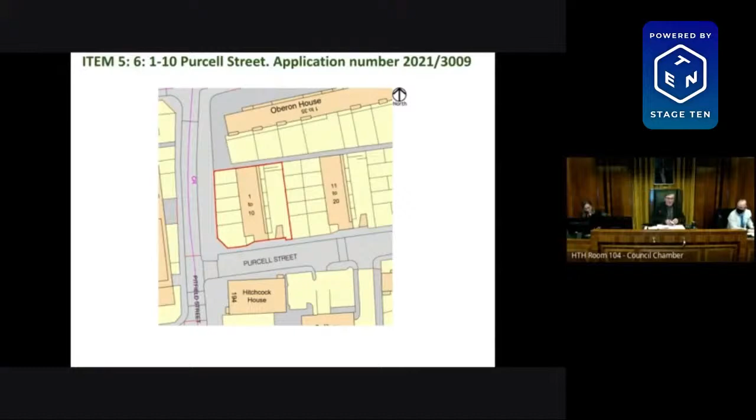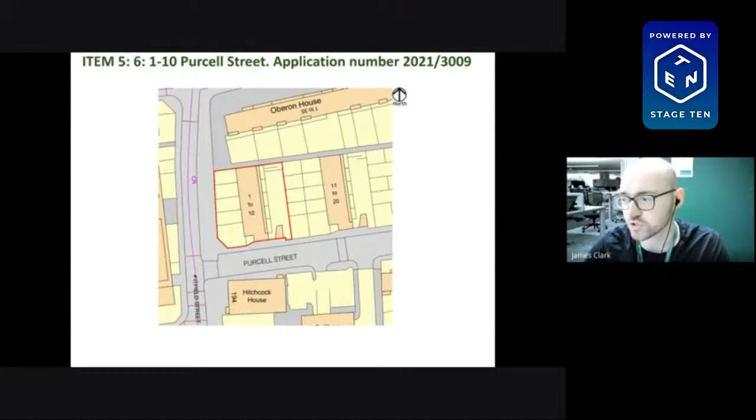This is 1 to 10 Purcell Street, at the junction with Pitfield Street, just to the south. We've already dealt with a similar application on this site, which was for the replacement of windows. This is a similar proposal, but instead of just replacing the windows, it will also be replacing the paneling below the windows, the doors that lead onto the balconies, and the communal windows in the staircase. So essentially, it's a very similar application to what we've had before.

It's also similar to one recently dealt with by committee - I think at the last agenda it was one of Danny Huber's applications. In fact, it's identical to that one. You can see in the surrounding context there are three blocks just behind this one where planning permission for an essentially identical proposal has already been granted.

This is a very strong established precedent for this sort of work in the area already. As you can see in the surrounding area, it's a mixed typology of buildings with varying different styles, most of them modern, with varying types of windows that already exist.

The reason this case is being taken to committee is because it's the council's own application, and we've received 2 objections from 2 residents in the block objecting to the works. Among the objections submitted, the most material are objections to replacing the timber windows with plastic, concerns that the existing windows are already of sufficient quality and don't need replacing, as well as concerns raised over the consultation.

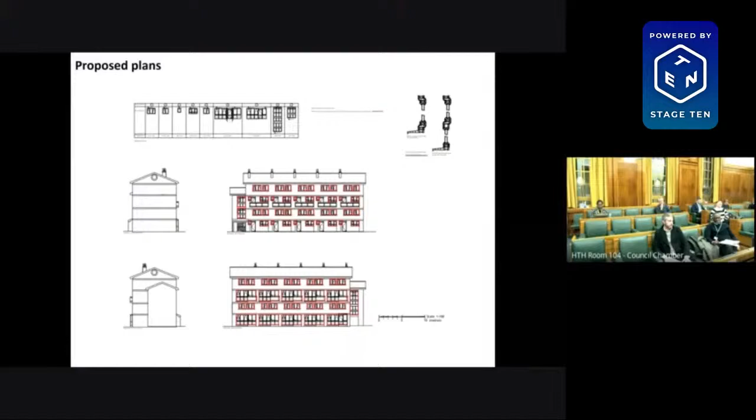I know we've seen this before, and I perhaps should have asked this previously, but having just been doing some work with sustainability strategies, I wondered how UPVC fits in with the council's sustainability strategy. It's just been pointed out to me that a planning application to change timber windows to UPVC windows was turned down. I suspect that's in a conservation area - it's in Eleanor Road in E8. I wondered whether we're taking a different approach to our own council buildings than to individual Victorian houses, and why.

Okay, so we're talking about this application, not applications in the generality. But James, if you can tell us something about that, then please.

I can't hear you, James. Unmute. Sorry about that. Sorry, Councillor.

In terms of sustainability, we weren't concerned about the existing timber windows - they're acceptable in terms of appearance. But in terms of UPVC windows, we have approved similar UPVC windows on surrounding sites already. We wouldn't normally approve such UPVC windows inside a conservation area. This isn't located in a conservation area, so potentially that other site was refused because it was in a conservation area. Regarding the actual sustainability of the windows, these windows, when maintained, do last for a long period of time, and therefore provide long-term use that is acceptable in our opinion.

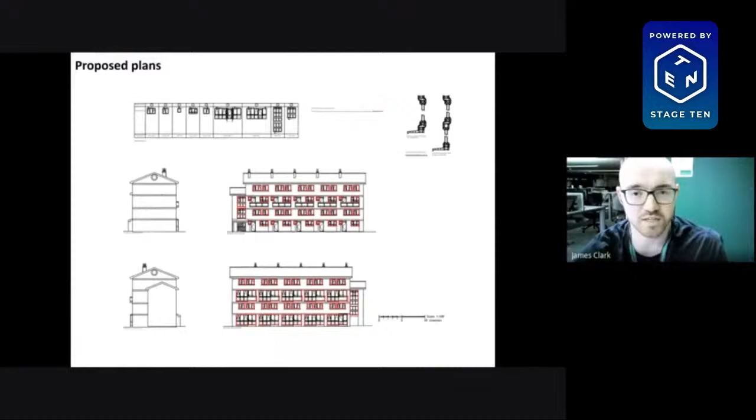I think you've got to have that debate with the housing department, not the planning department, Councillor Young. Claire?

Well, you'll need to have a go at the housing department about their attitude to timber versus UPVC, and it would be useful - we've got a quantity surveyor here. Do meet with the officers, but I think we've heard enough in terms of making a decision on this particular proposal. Okay? Or do you want to pursue it?

That's a good question. Please switch your microphone on. We certainly did - it was roughly 2 to 3 times the cost, renewing in timber as opposed to UPVC.

So I understand the comments, but I think if you renew windows, timber windows, it's more likely to be a street property, to the beautiful terrace houses that you've got, as opposed to a block that needs renewal - they're at the end of their life. We looked into it, but at the end of the day, you've got such a housing stock and a finite amount of money. We would like to renew in timber, but funds dictate.

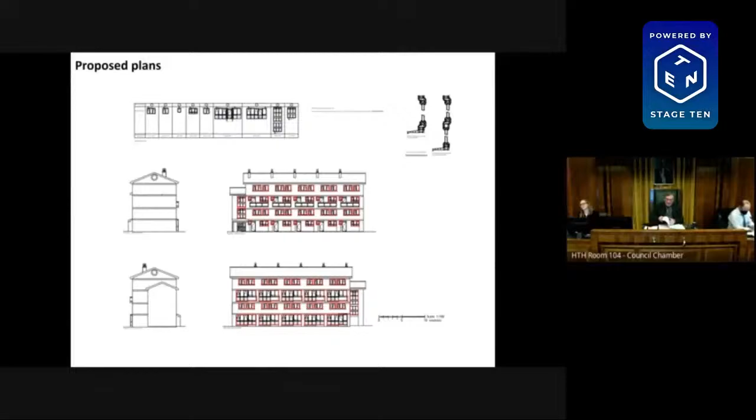Sorry, move on to Haggerston Bath. So objector, please - if you could come and sit over here. If you could come and sit on this closest one to me, that would be uncontaminated. A clean one next to it. That would be good. Thank you very much indeed.

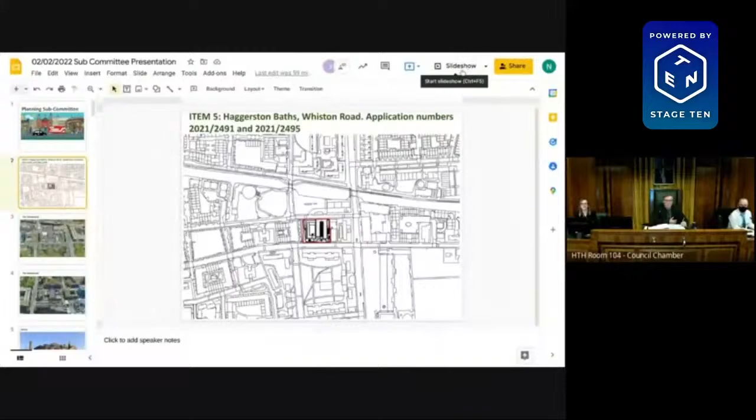The model, we'll go and have a look at it in a minute. We haven't got a table - it's a huge table, so we're going to have to go and have a look at the model. Okay, so without further ado, over to Nick, I think it is. Nick, please - that's correct, can you see that? Yes, share the screen. Oh.

2021/2491 is an application for the building known as Haggerston Baths. You're also asked to consider 2021/2495, the associated listed building consent.

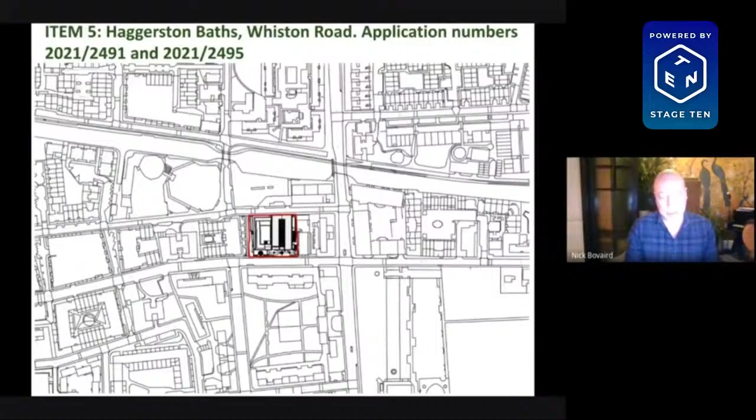The site is bounded by Laburnum Street to the north and Whiston Road to the south. It contains a Grade 2 listed building formerly in use as a public swimming pool, with ancillary uses such as baths and a laundry. The site borders the Regent's Canal Conservation Area across Laburnum Street to the north. It's also within the setting of the Hackney Road Conservation Area across Whiston Road and Queensbridge Roads in the southeast.

The application follows a consultation process to find a new use for a disused Grade 2 listed building that was last used in 2000, which ended with Castleforge selected as the preferred bidder in 2017. The building is included in the Historic England Heritage at Risk Register 2021 and has been on the register since at least 2014.

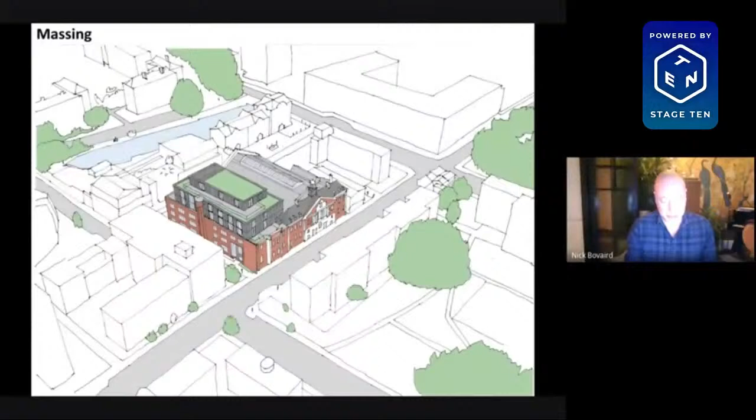In addition to the offices in the new western wing, the proposal involves a refurbishment of the listed building to provide a flexible community use and event space in the former pool hall here, basement maker spaces here, a separate community hall here, and a gym here.

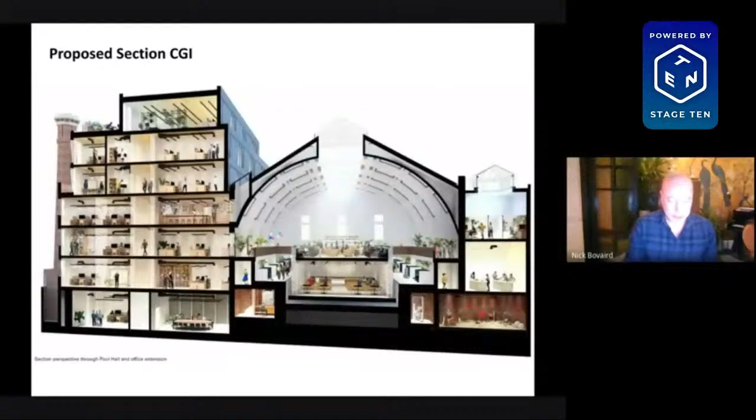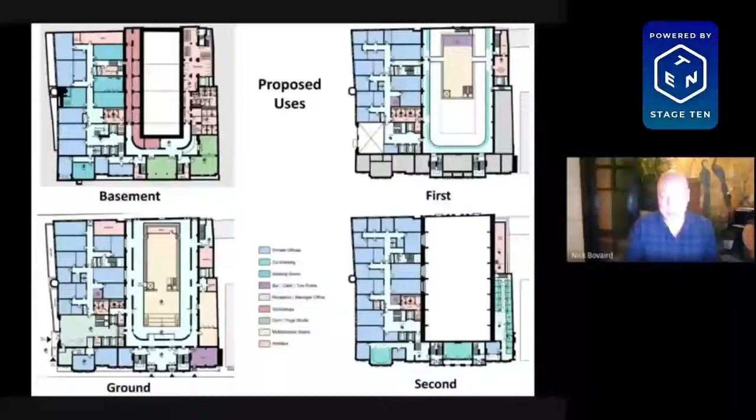On the second floor, the women's slipper baths are retained, but with the help of removable wooden boards, the baths are turned into co-working desks. The upper floors show the massing of the new western wing and its use as office floor space.

530 square meters of discounted workspace would be provided, which would be leased at 80% of market rate and captured within the legal agreement. This discount does not meet the threshold for affordable workspace under the new local plan, which reflects that the proposals were drawn up prior to the cyber attack and prior to the plan.

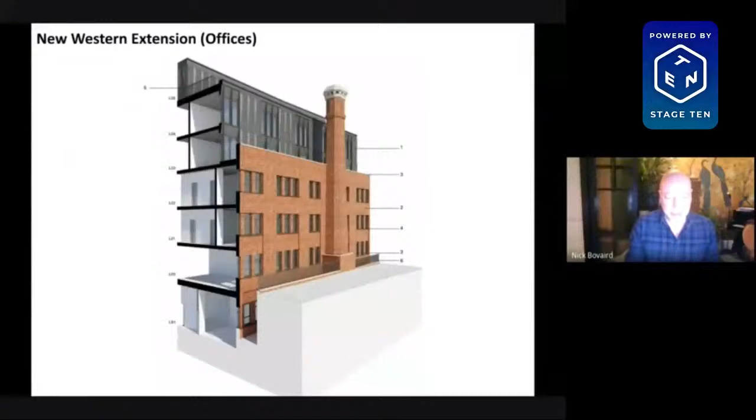The constraints of the listed building and its renovation are noted, and the proposed discount is considered acceptable in this instance.

The condition of the building is deteriorating, and asbestos contamination has left the basement inaccessible. Given these circumstances, it's recognised that the repair of the building will involve significant costs. And in the 20 years that the building has been shuttered, it's not been possible to find any operator who would be able to reopen the facility as a swimming pool.

In the meantime, the Britannia Leisure Centre swimming pools have opened nearby. The proposal provides an imaginative mix of uses with the potential to become a community hub, providing events within the large volume of the pool hall to draw users in.

The proposed condition would ensure that the use of the pool hall is accessible by members of the public at least 5 days of every week. And as is laid out in the committee report, all of the proposed uses are considered acceptable in principle.

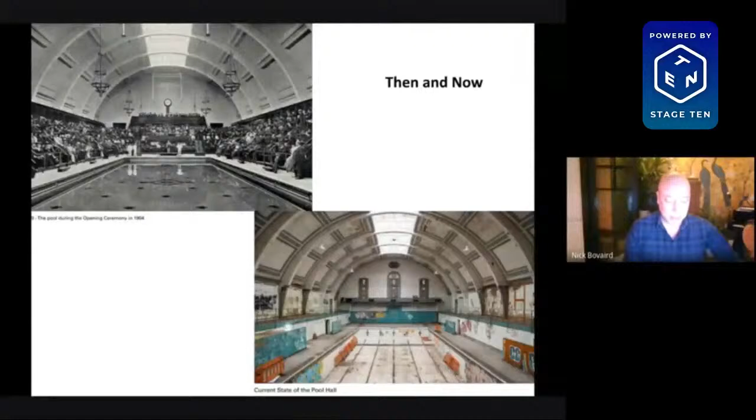In conservation terms, the repair and reuse of this listed building is a considerable public benefit.

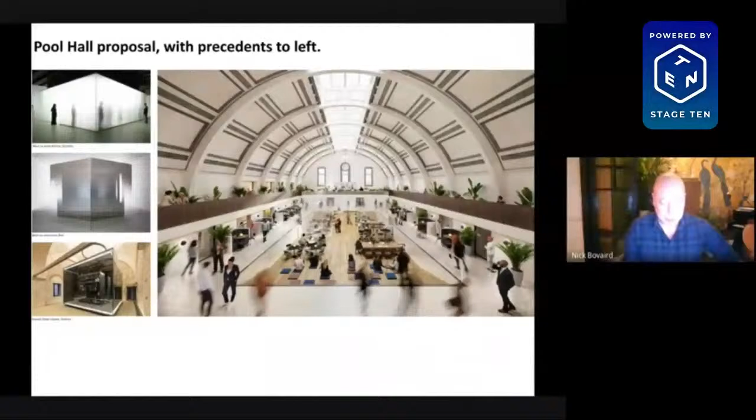This image shows the proposed pool hall. Less visible than perhaps it might be when constructed, a 2-story glass enclosure is shown in part of what was space for the swimming pool itself. Precedent photographs for this construction are shown on the left.

It's accepted that the demolition of this original part of the building would cause harm. But these areas are of lower status and have been repeatedly altered to facilitate the changing use of the baths over time, removing much of their original character. The first floor area and roof are in particularly poor condition with serious structural issues. As such, this demolition is considered to cause less than substantial harm.

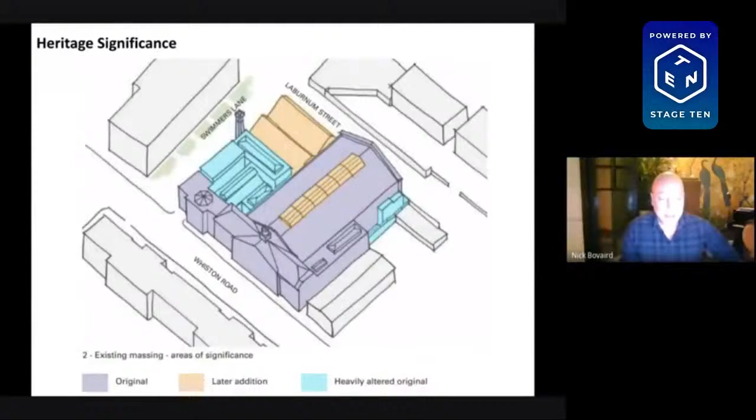3 elements of the basement level plant would be removed prior to demolition and placed within the reception area of Swimmers Lane, including a front section of one of the enormous boilers, where they will be permanently displayed.

The restoration of the retained parts of the building is a heritage benefit which weighs heavily in favour of the scheme as a public benefit. Nevertheless, extensive conditions are proposed to ensure that the scheme is carried out in a manner that befits the listed building.

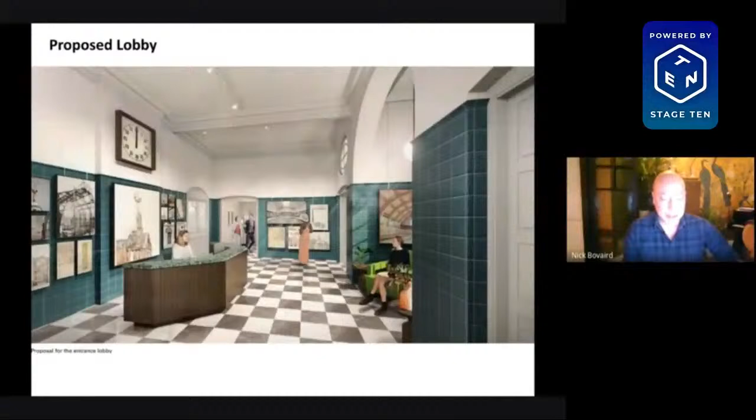We note that the viability work undertaken by the applicant has provided additional information in relation to the impacts to the scheme of the removal of this top story. Overall, the less than substantial harm it would cause to the listed building is balanced against the restoration and reuse of the building and found to be acceptable.

More generally, the proposed western elevation is considered to be slightly too tall for its context. It's insufficiently subsidiary to the host historic building since it slightly challenges the building in its visual relationship with the retained chimney and the ridgeline of the pool hall and front block. Again, the harm is considered to be less than substantial and the public benefits of the proposal balance acceptably against the harm.

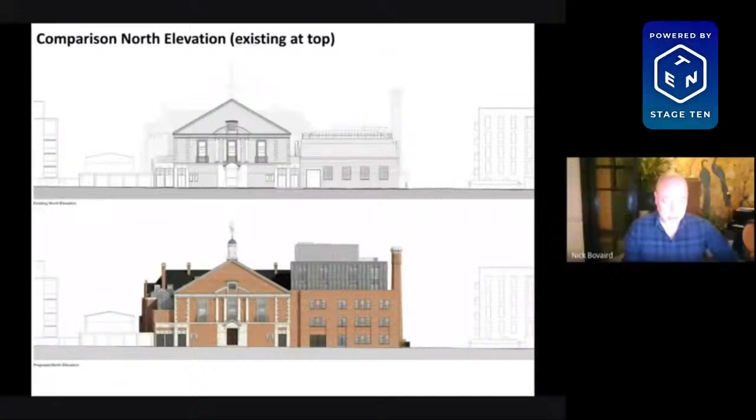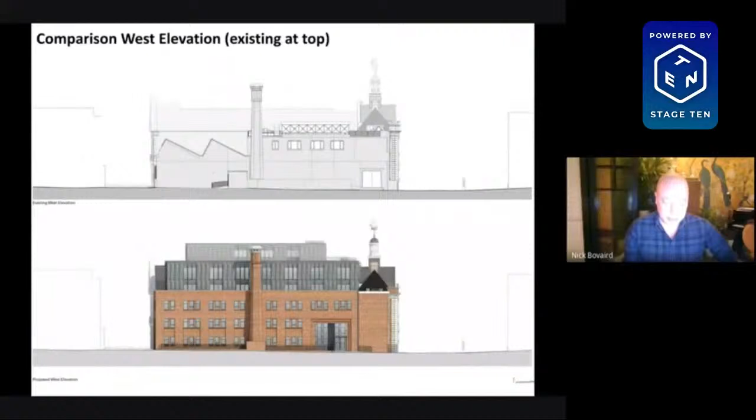Aside from the height, the western wing is considered to respond well to the existing building in its context. The design is muted in manner of red brick like the host building, with the use of grey metal to the upper floors as a reference to the large historic water tank. The proposed new double height entrance in Swimmers Lane provides a positive and striking feature to the west elevation.

In amenity terms, the closest relationship between the site and neighbouring residential windows is across Swimmers Lane to the west. When these modern blocks were approved, it was recognised that Swimmers Lane would regain its post-war importance as a main entrance to the building if any redevelopment of the proposal site were to occur, and the lane was designed accordingly.

Objections to the proposal on amenity grounds have focused on the relationship between these existing buildings and the proposed office use. But officers consider that the distance between proposed and existing windows, which varies from 13 to 15 metres along the lane, represents an acceptable degree of overlooking, not untypical of the urban grain in an inner London location.

In daylight and sunlight terms, a report has been submitted that demonstrates that the retained levels of both daylight and sunlight should be considered acceptable. This is fully assessed in the committee report.

The windows where there are no balconies, the retained VSC is in the mid-teens, which is considered acceptable in this location. In these and other respects, the amenity impact of the proposal is found to be acceptable.

Delivery, servicing and waste collection would take place on Laburnum Street using 2 rear entrances. Cycle parking would also be accessed from the rear and is contained within the basement here.

The cycle parking falls short of policy target levels, but this is understood given the constraints of the listed building, and Highways money has been secured to convert 2 parking bays on Laburnum Street and Whiston Road to provide further cycle parking.

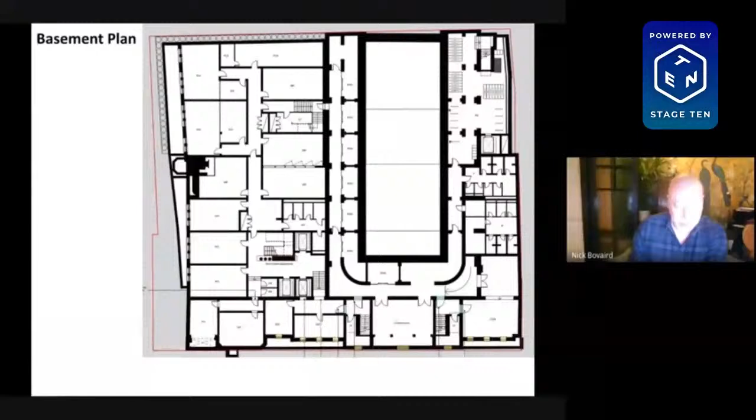34 visitor cycle parking spaces would be created within the red line boundary here on Swimmers Lane. This would replace 20 existing cycle spaces on Swimmers Lane. 2 blue badge parking bays will be provided on the public highway within 50 metres of the site and prior to occupation.

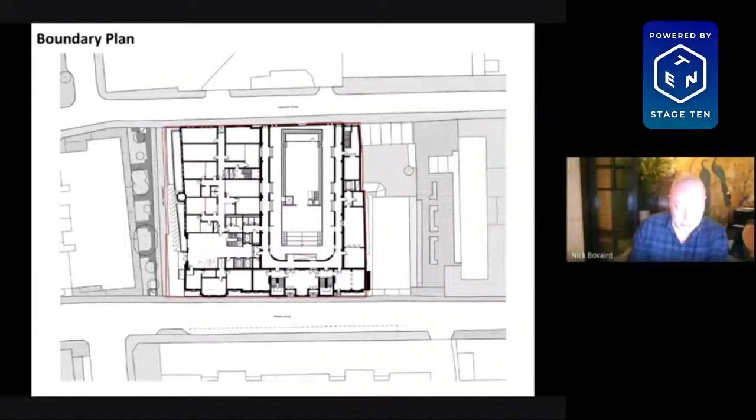Room is limited on the site for landscaping, but a net gain to biodiversity is proposed, including green roofs and bird and bat bricks and boxes. Air source heat pumps will be installed and a carbon offsets payment is proposed. The development is considered acceptable in respect of biodiversity and sustainability.

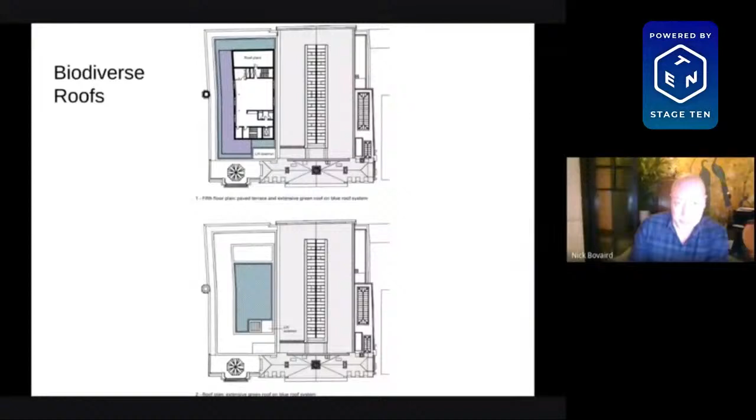So to conclude, the proposed application is considered to be policy compliant. It would bring back into use a highly visible Grade 2 listed building on the Heritage at Risk Register and provide both employment and a high-quality community hub in the restored main hall. These public benefits are considered to balance favourably against the less than substantial harm that the

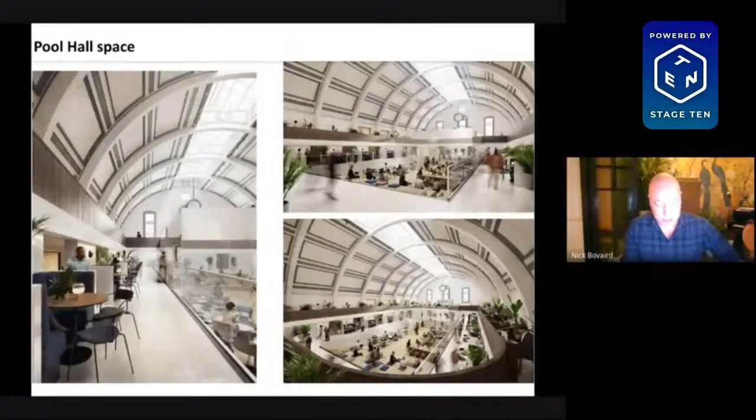development causes the listed building. As is detailed in the committee report, in these and other respects, the scheme is considered acceptable. It's recommended for approval subject to a number of very detailed conditions and the legal agreement.

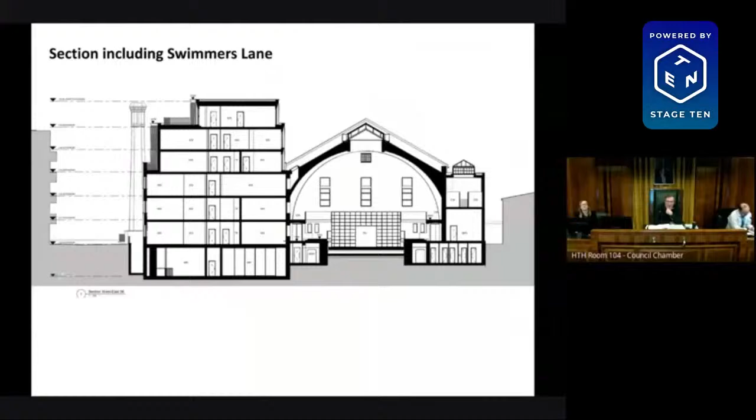So the 4-storey building comes to the top of the 5th storey of the new building, which is itself set back. And I think the argument in your report is that this effectively mirrors the building across the alleyway, or the swimmer's lane. Is that right? That's right. It's not exact mirroring because the boundary is slightly different on each of the buildings, but it's important to note that the scale of the new building is not dissimilar to what you've got on the Basement Mill and London Mill apartments.

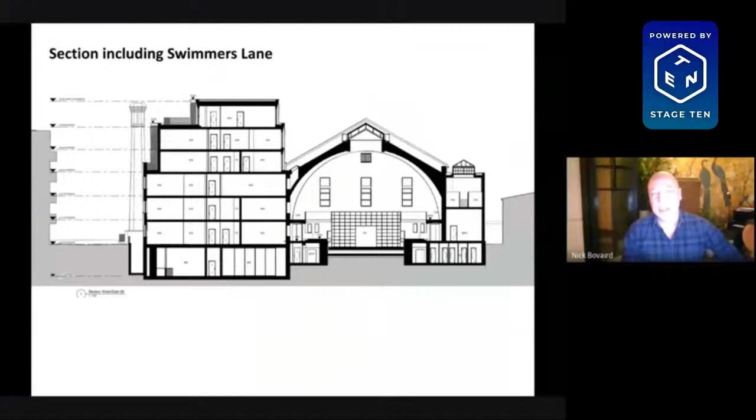That's true. I think it's also worth noting that the impacts talked about are largely caused by the balconies on these existing buildings, and where there aren't balconies, the daylight VSC that would be left is mid-teens, which is commonly found acceptable in an inner London location like this. The BRE guidance is for suburban development, so it's treated with a certain amount of flexibility in inner London locations like this.

Thank you. Members, do you have any questions, please?

I wondered if we could hear from the conservation officer. Okay, we can. In generality? Yes. Okay, Tim, tell us what you think about the whole story, please.

Okay, I've been involved with the building since 2015, and it is on the Heritage at Risk Register, and it is in very poor condition indeed.

If we look at the harms and then the benefits, it's all in the report. The harms are that part of the building, two main parts, are demolished. There's a part to the northeast which we're not too worried about because it's in very poor condition, isn't particularly significant, and is replaced with a similar volume, which we think is entirely acceptable. The part to the west is mixed. The 1954 element to the northwest - demolishing that part is probably a benefit because it's later and quite detracting.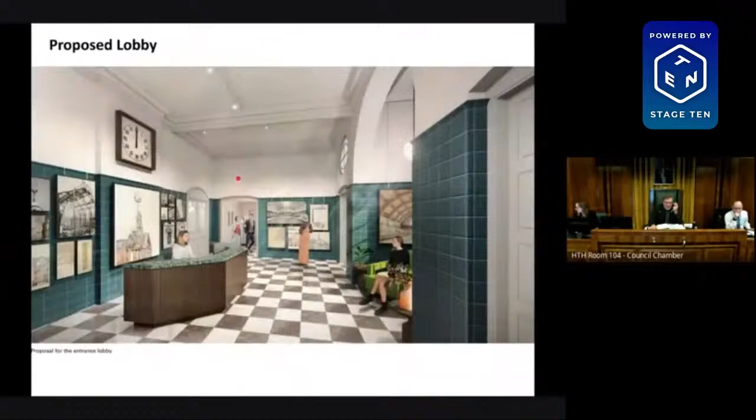The first floor was the second-class men's baths, and that's been completely stripped out for a gym. And it's also worth pointing out that that bit of the building will probably fall down before too long, because it's got some really serious structural issues with some cracks.

It's a sort of set of fire exits and a fire escape off the roof. Some of that is from the 20s and is non-original. Some of it's original, but has also got some structural issues. And that area also includes a very decayed service yard, and that's replaced by a slightly similar building, keeping the original entrances at ground level, but allowing for some plant and proper access to the bike storage areas. We didn't have an issue with that.

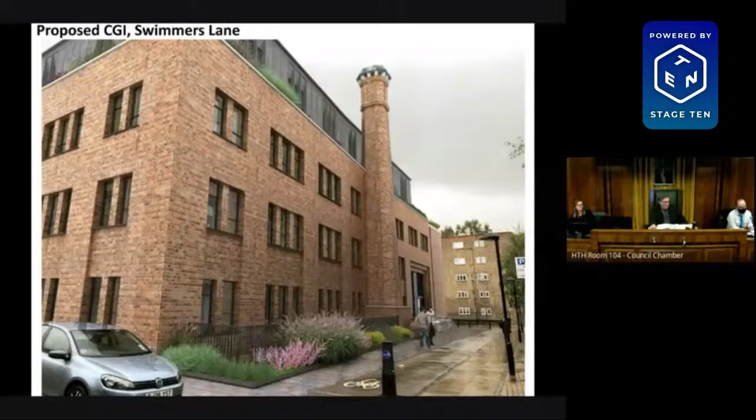I know the objector has talked about 52% of those windows failing, and I know your response is that it's appropriate for inner city development. I just think it'd be fair to the objectors if you gave a bit more of a detailed explanation on that - so why is it failing 52%, and why is it appropriate for inner city development? Can we have a bit of an expansion on that, please?

Balconies are always going to be difficult because they block a view of the sky by definition when you're underneath them, but they do provide an amenity benefit, which is why they're built into buildings, despite leaving the windows behind them with lower VSC than you'd otherwise expect. Those windows that don't have a balcony above them have got VSC in the mid-teens, which, while low compared to what the BRE guidance says, there's a lot of case law on this, and we commonly make decisions in these planning subcommittee meetings where mid-teens is considered acceptable for buildings not in a suburban context like the BRE guidance suggests, but in an inner London context.